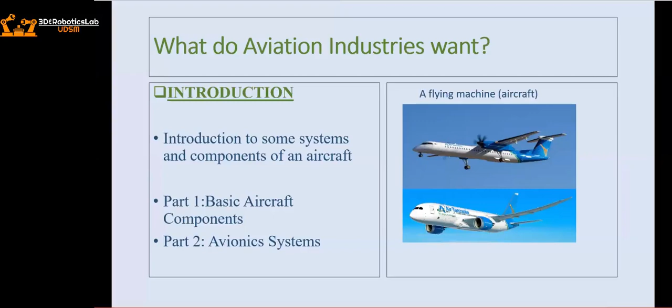Now, through the basic aircraft components, we have the fuselage. The fuselage is the hollow part that holds the wings, the tail part of the airplane, the power plant, the landing gears, and the wings. So the fuselage combines the cockpit and the cabin in the interior. On the exterior, we have the empennage, the wings, the power plants, and the landing gears.

You have the altimeters, the airspeed indicator, the vertical speed indicators, the artificial horizon - every system or unit is in its own instrument. But in the glass cockpit, we have computers or displays. The display can show all the systems in one unit, so the pilot doesn't have to observe different instruments to see his flight parameters, altitude, or airspeed - everything is displayed on the computers. We call them the primary display computers and the multifunction display computers.

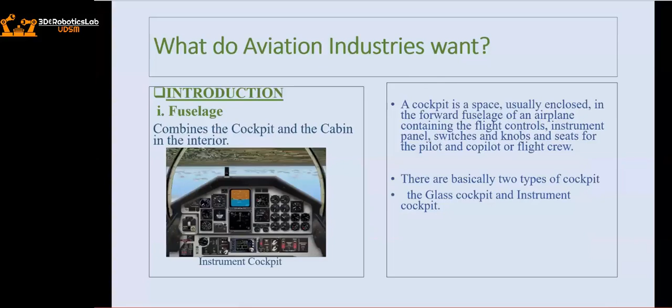So as part of the fuselage, I said we have the cockpit and the cabin in the interior. The cockpit is where the pilot and co-pilot sit, and the cabin is where the passengers sit during flight. In case you have any questions, you can write them down and I can explain more if you want elaboration on the part I've covered.

The second part, I said we have the power plant. On the power plant, okay...

Sorry, what is this? Hello, I can't hear a sound in the meeting. Somebody cannot hear me.

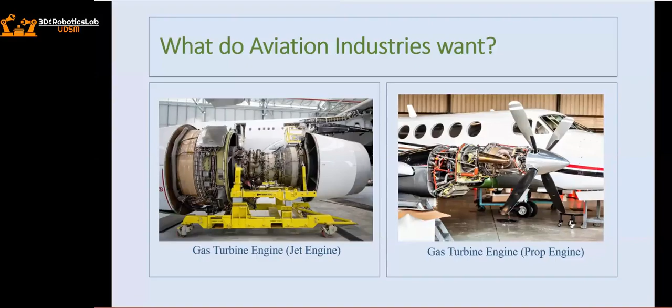So coming back to the fuselage, I missed this part. The structure of the fuselage is like a hollow cylinder, a long cylindrical tube. That shape is designed to allow air flowing to allow the aircraft to fly. And the structure of the wings also is in the aerofoil shape. That aerofoil shape also facilitates lift.

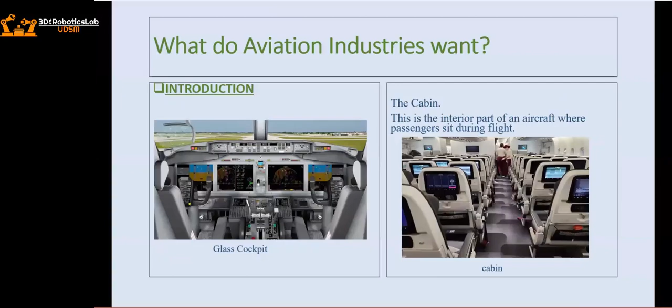The engine now, coming to the power plant, what the engine does is give the forward movement of the plane. So to generate that, the forward movement is what we call thrust. We use the engines to give the thrust or the forward movement of the plane, whether it's during cruising, when the aircraft is already up flying, or during taxiing, when the aircraft is on ground. We use the engines for forward movement or for thrust. So the engines give us the thrust, the fuselage allows us the lift.

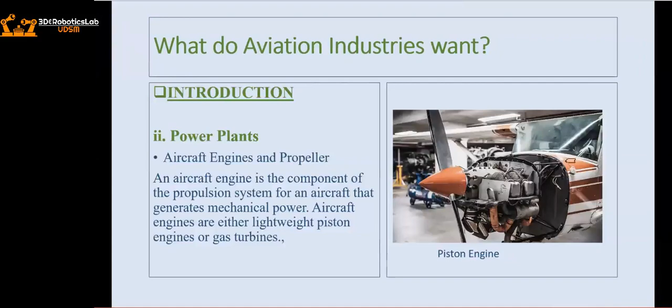We also have the wings as the main component of the aircraft. Wings provide lift force for flight and carry fuel tanks. On the wings, most of the airplanes, the wings is where the fuel tanks are. We fill the fuel on the wings. Inside the wings we have the fuel tanks. In other types of aircraft, we have the fuel tanks on the center part of the fuselage, just below the stomach of the plane.

The wings are huge. We have the flaps at the back of the wings to accelerate or to facilitate lift. The shape of the wing itself cannot give an adequate force for lift. So to regulate that, we have the flaps, which we can extend or retract to a certain angle that is comfortable for the plane to fly.

We also have the empennage as the 4th basic component of the plane. The empennage is the rear part of the tail assembly of the fixed wing aircraft. Speaking of the fixed wing aircraft, if you remember, I said before, we have the fixed wing aircraft and we have the rotary wing aircraft. The fixed wing are the normal aeroplanes we know, that have their wings fixed. They're not moving, the wings are there. And the rotary wing aircraft is the helicopters. The helicopters, the wings rotate on top of the aircraft to accelerate or to support lift.

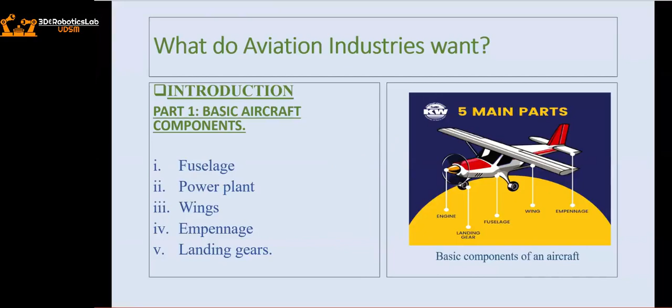So I already spoke of the empennage, where we have the horizontal and vertical stabilizers. Then the fifth main component of the aircraft is the landing gears. The landing gears support the aircraft while on ground. This plays a very crucial role in aircraft movement on ground, during taxiing, takeoff, and landing. Without the wheels or landing gears, the airplane could land on its stomach, which would not be good. So to have a safe landing, or a safe aircraft on ground, we have the landing gears.

Are we together up to there? Yes, yes, yes. Thank you.

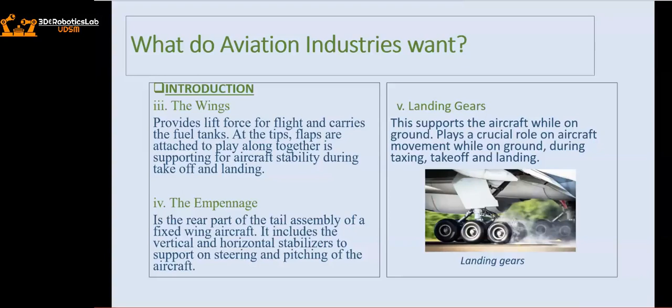Okay, now I'll take you to part 2 of the introduction, where I'll share with you some avionics systems of the plane. I'll start with the aircraft radio systems. For the pilot to take the plane to a certain point, he needs to communicate with the towers, with other airplanes, and with the operation department of his operators. There are so many parties that the pilot needs to communicate with, because he can't see everything when he's on the plane. So we need the aircraft radio systems.

On the aircraft radio systems, the system is the same as the radio system you know - the same one we studied in college, the very same mechanism. Much of the aviation communication is accomplished through radio waves, the very same radio waves used in microwave communication, but here we have different frequencies.

So we have the VHF communication, the very high frequency communication, through which the pilot communicates with the tower, with other aircraft, and with people on ground. Then we have the DME, the distance measuring equipment, where pilots can determine the distance before landing. We also have the GPS, the global positioning system, for the plane's position.

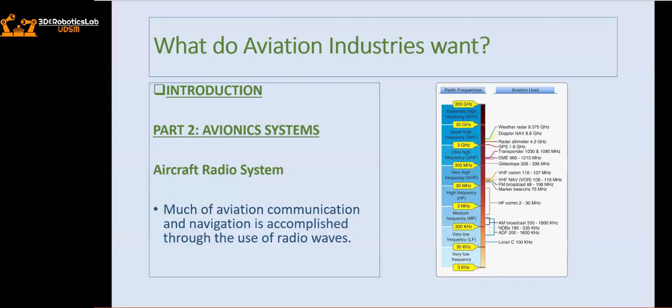Okay, this is just the basic transmitters and receivers, the very same ones we are taught in school. So there is nothing new if you have the basics of how the system works, or the basics of radio communication - this is very easy for you.

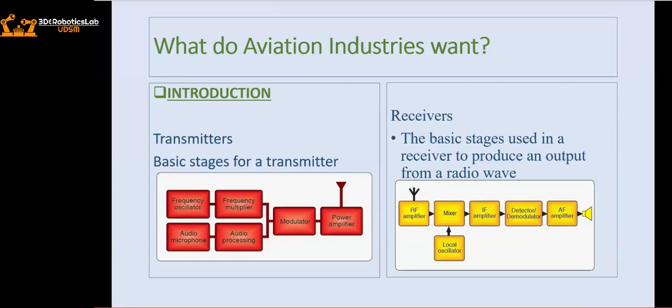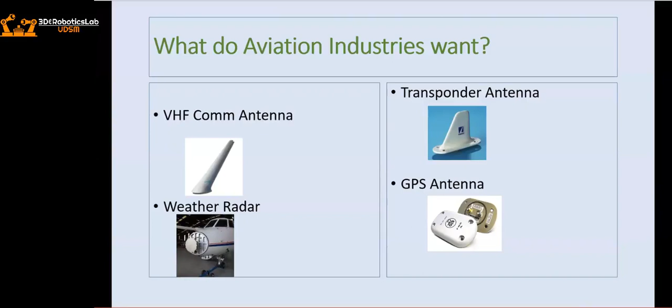And the system, as I said before, the aircraft radio system operates the same as the normal radio system we study in school. You need the antennas, you need the transceivers, the transmitters and receivers. So the signal is sent, received at the other part by the antenna, and is sent back to the receiver. It's the very same system, the very same mechanism applied. Then I'll take you through the flight controls - this is one of the most important systems on the airplane.

The flight controls give the attitude of the plane. The plane needs to move forward, steer to the left, steer to the right, roll to the left, roll to the right. The plane needs to pitch nose up during lifting or takeoff, and pitch nose down during landing. So we really have these flight controls, which play a very important role in controlling the whole of the flight.

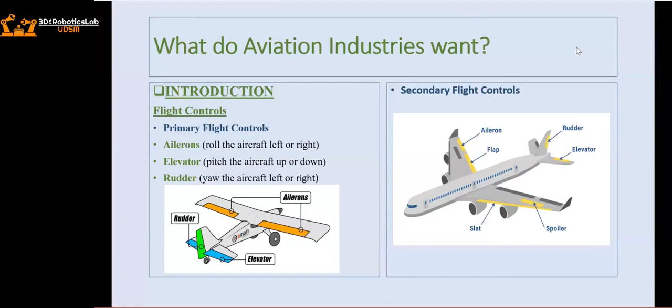Okay, I'm going to the other system, the aircraft electrical system. As part of the avionics - avionics is all about radios, electrical, navigation, and instrumentation. All those parts are parts of the avionics. So the primary function of an aircraft electrical system is that it generates, regulates, and distributes electrical power throughout the aircraft.

We have some sources of power in the plane. In the aircraft, we can get power from the aircraft batteries. The batteries are mainly used for emergency. We don't use the batteries throughout because they can drain, and we need an alternative source of power when we have any power failure. So the batteries are part of the emergency power source.

We also get power from the ground power unit, which is installed or connected on the plane when the plane is on ground to give power. The ground power unit can have its own battery, or it can be getting power from the generators, or it can have power from the main building power source. That's the ground power unit.

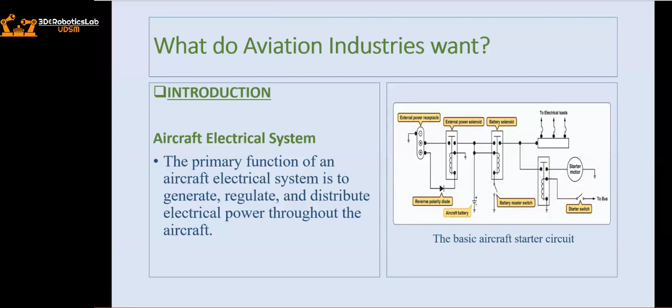Oh sorry, another source of power is the auxiliary power unit. It's a small engine installed at the back of most planes, and this gives power during ground. We need power during ground - during flight you use the engines, but on ground we use the auxiliary power unit as the source of power. So basically we have about 4 sources of power in the aircraft: one is from the main engine generators, second is from the batteries as part of the emergency, third is the auxiliary power unit, and the fourth is the ground power unit that is connected while the aircraft is on ground.

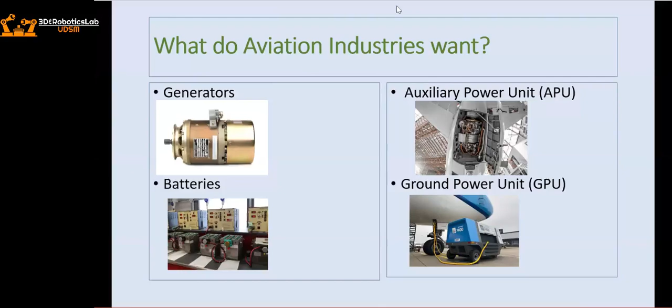Okay, we are done with the introduction part. If there is any question or any concern, I welcome you for that before I move to the aviation and avionics part.

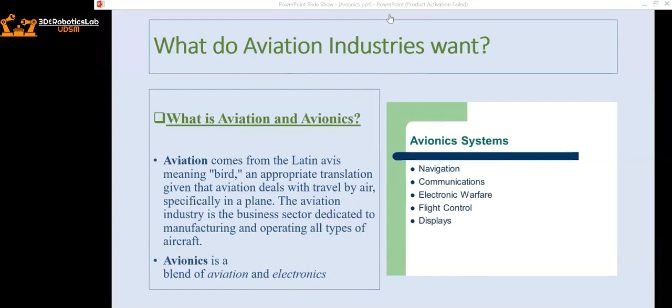Aviation, as I said, is broad, it's huge, but all in all, aviation deals with the manufacturing of the aircraft, operation of the aircraft, maintenance of the aircraft, and everything to do with the aircraft. We call it the aviation industry, or just aviation. From manufacturing to operating. Through operating is where the maintenance part comes in.

Then we have avionics. Now, avionics is the blend of aviation and electronics. Before I go to avionics, aviation is broad. It has the maintenance part.

Okay, what is the source of the auxiliary power unit? For auxiliary power units, this operates the very same way as the engine. It's a small engine installed on the plane, and this engine operates the very same way as the main engines of the aircraft. It has its own starter generator to start the engine and the generator to produce power.

To answer the previous question, from Domele, what is the total output power of the GPU? Our aircraft runs with DC and AC power. Under DC, we use 28 volts DC. For AC, mainly we have 115 volts AC or 26 VAC. So your GPU depends: if it's an AC GPU, then it has to give you the 115 VAC, and if it's a DC ground power unit, then it has to give you the 28 volts to supply the aircraft systems. Okay, I hope I've answered your question correctly.

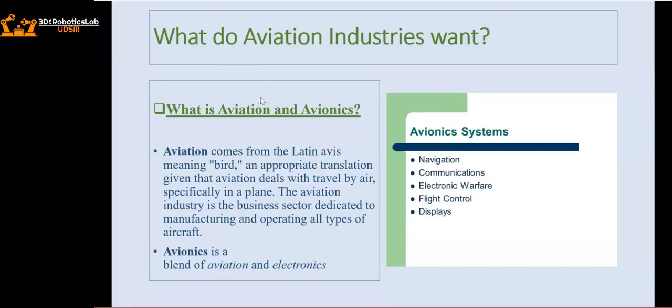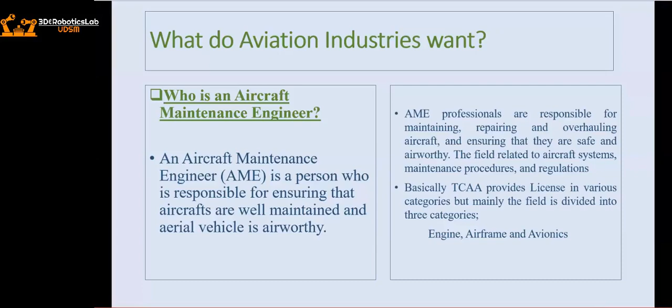Okay, any other question? I think from that I've explained how to become an avionics engineer from the previous explanations. I said to obtain this license, you need to have 4 years of experience working in an approved maintenance organization, or 2 years of experience in an approved maintenance organization if you went to an approved training organization. Then TCAA will provide an examination to test your knowledge and skills before giving you the license. And this license is the one that gives you the authority to release an aircraft back to service after any avionics maintenance, inspection, or repair is done on the aircraft.

Okay, we have one new message here. As the maintenance engineer, do you have any pilot skills? Some sort of, but you're not allowed to fly the plane. You can have the pilot skills, you know how to make the plane fly, but you're not allowed to do that according to the regulations. And you cannot dare to do that, because the moment you do that, your license is at risk.

Does heavy rainfall cause any challenges during flights? Yes, heavy rainfall is not good. As I said before, we have the weather radar antennas on the plane to show you the weather of where you're going. If it's really heavy raining, then aborting the flight is allowed, or aborting landing is allowed. You cannot land if it's heavily raining. So it causes challenges, and if it's really severe, you're not allowed to land. During cruising it's not much of a problem.

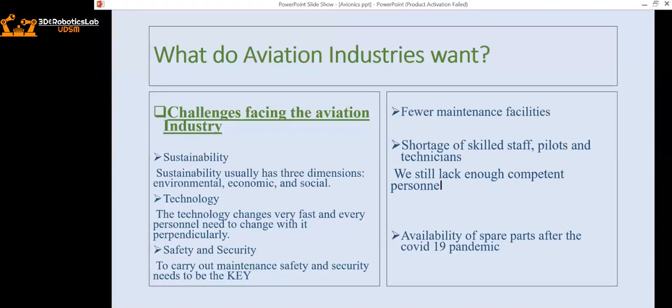I welcome questions, any question please feel free to share, feel free to ask. Have you taken any short course certification before joining Air Tanzania?

I was doing my EASA examinations in the United Kingdom and Dubai, but this is for international aviation. It's called the EASA Part 66. I was doing these exams for my EASA license, which is also a maintenance license, but this is for international duties, not for the local authority. It's the same exams as I was doing with TCAA, but the EASA is under UK Civil Aviation, and they give you a license that allows you to work all over the world.

It's an international license. What is the safety while working in the industry? We have the safety maintenance manuals that we use, that lead us or give us the way forward for our day-to-day activities. So while working in the industry, the safety measures or parameters you'll be given by your employer. So if it's Air Tanzania, they are responsible to give you the safety keys or safety measures to take while doing your day-to-day activities.

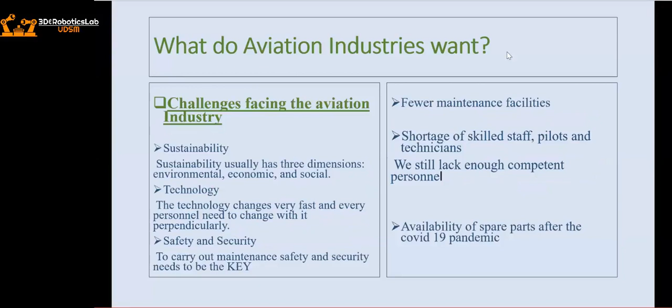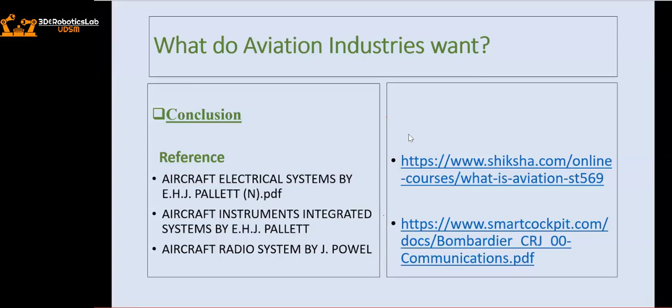Hello, thank you very much Halima for such a wonderful presentation. I was listening, I was on the road, and I really learned a lot from you and from the presentation. I truly appreciate it. Yeah, I think a few of my colleagues that joined, and even students, I think they also enjoyed it a lot. Thank you, so let's keep in touch, and for other logistics I'll check with you.